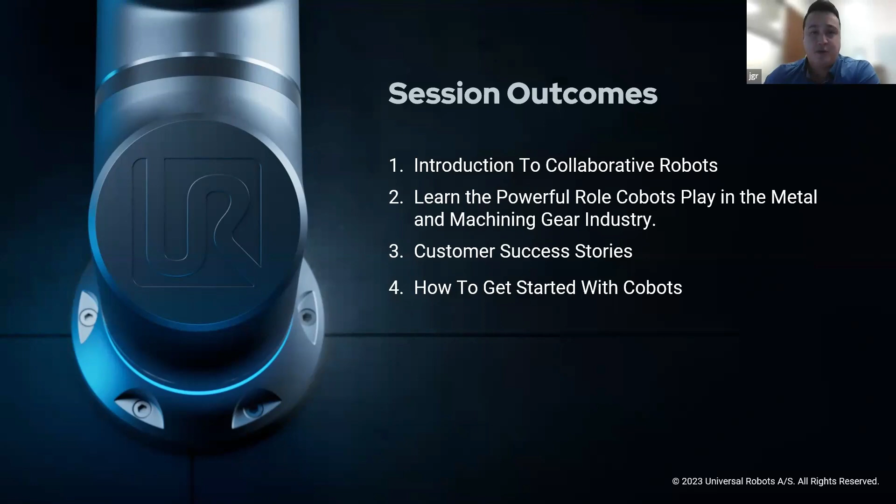And then I'll lead you quickly through how I would get started. If I were to listen to this and have some questions, this is how I would do it, and I'll lead you through some good thought processes on that.

I think it's important to look at our story. When I look at a company, doesn't matter what it is, from a house to your wife and family, you buy products based on sometimes knowing the story, knowing the foundation of that company. You end up having some greater pride for the products you use or utilize in your life. I want to share that with you because it's really important and critical where we came from, and representative of why we're still here today and very successful.

We began with asking a few very important questions. I love what's stated in the middle of your screen: automation for anyone, anywhere. Back in the early 2000s, our company began by asking critical questions, criticizing and scrutinizing what had existed for the last couple of decades in robotic automation.

So they asked, why was automation not built for anyone? Why couldn't it be deployed in more places across the facility? We really did try to create and establish a product that was innovative, revolutionary, that allowed people to say, okay, this is able to be a more utilized tool than I previously thought capable. And I'm talking about robots.

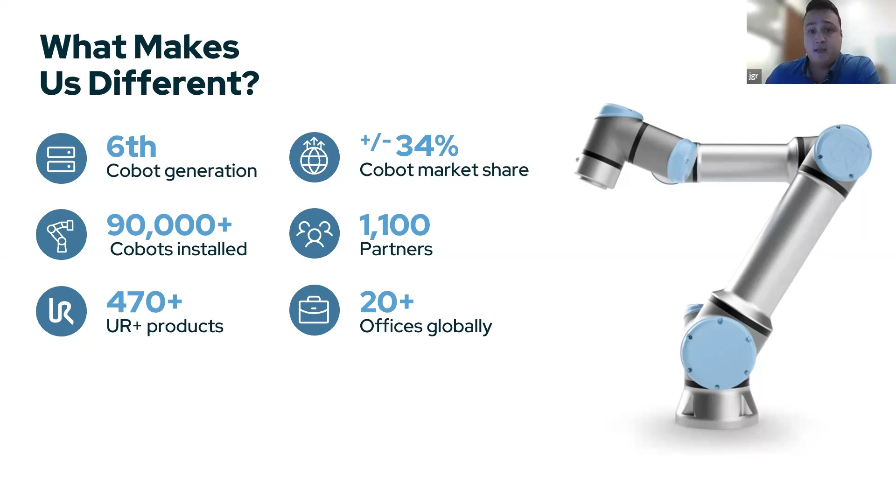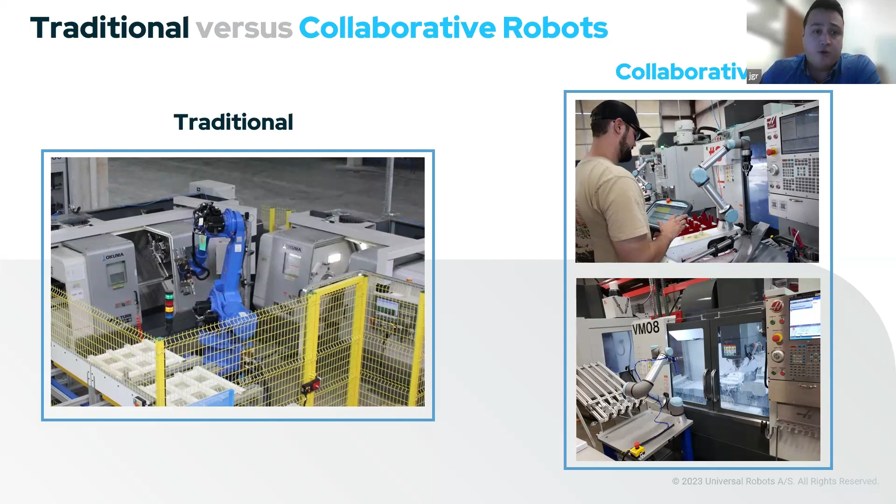On the right-hand side, you can see our product, which is positioned right next to another person. Depending on your environment, this could be critical where you do not have maybe the intrusiveness or the requirement for traditional robots, which is summarized here. And this is generally a general statement, right, or general versus, so bear with us a little bit.

The difficult setup—we're trying to be as fast as possible to set up within your environment, so you're up and running, making parts. And the sooner you're making parts, the sooner you're calculating that return on investment, instead of requiring high programming expertise.

That's something we scrutinized, right? We looked at it really deeply and asked, well, what could we do different? We took a path forward that I'll show you in some videos and demonstrations that allow you to say, okay, yeah, you can touch it, you can teach it by hand.

That's awesome. Instead of a fixed installation that had to be highly dedicated, we looked at a versatile deployment, where a robot—depending on what's going on in your production demands—you may decide to shift, may decide to say what I'm doing right now is not as productive with that product, with that system, that solution, as if I brought it over here and did an inspection.

Maybe your CMMs are backing up. You're like, well, if I could automate that, I could clear up some space, and I'll bring it back into the CNC environment when I'm required to, or when that demand's there. Just sharing that there's a vastness of versatility if things change in your production demands.

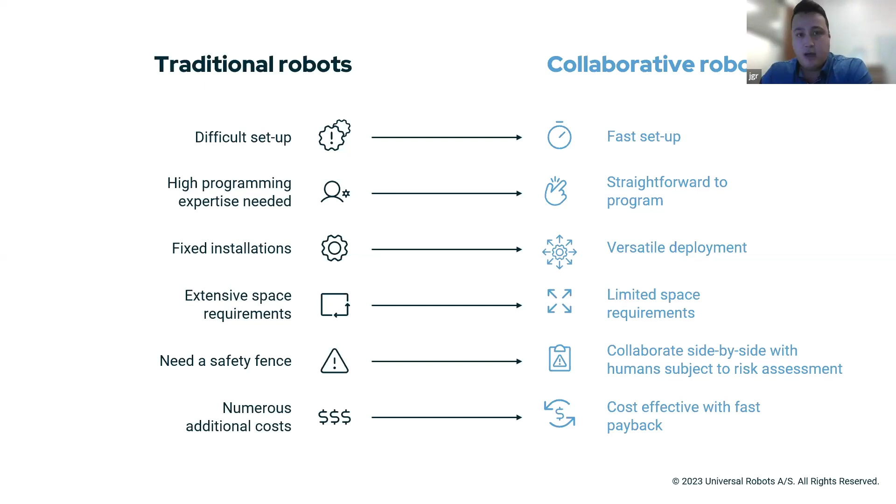Extensive space requirements, need for safety fencing, and those additional costs—those are things we try to work away from as much as possible, right? Limit the space requirements and try to collaborate human to human, or side by side with our robots.

And obviously this is more of a benefit for those that are crowded, those shops that may be multi-generational family buildings. So you are absolutely at the brink of the max of what you can produce in that facility, unless you blow out walls.

So having to reconfigure, move all of your infrastructure for your machine tools—it may not even be feasible, and that may create an issue identifying a place where automation really fits.

So I think it's kind of important to look at this, and again, nice imagery, sort of showcasing that for you guys.

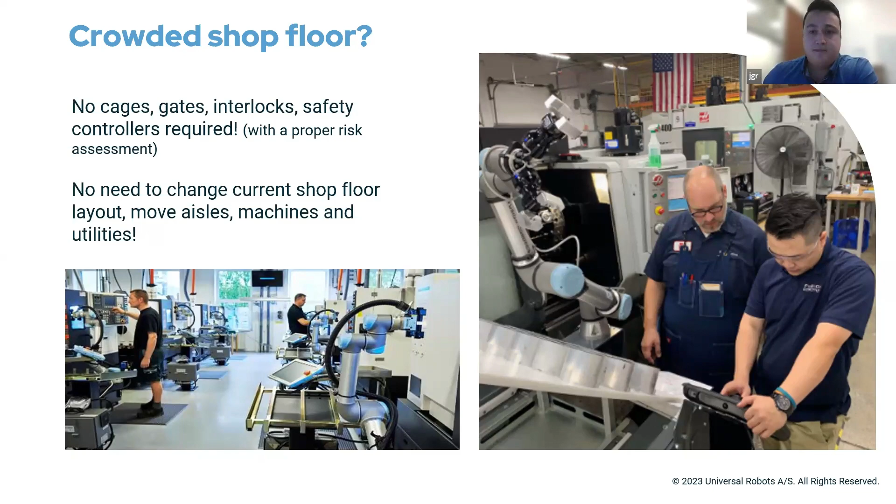User friendly technology—sort of talked about that a little bit, but one thing I can say is that teach pendant there comes with every robot. And one of the things that's different about it too is this free drive functionality. We created a free drive functionality for the purposes of allowing you to really touch and feel your robot, to get intimately involved with training, whether it's moving it through brash or coarse movements.

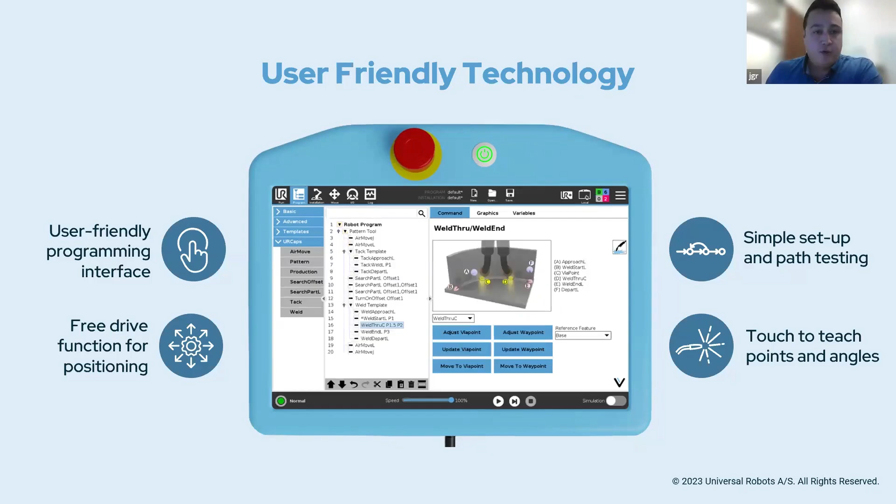And then kind of refining in. We can show you through actually just this screen here that we can position this robot very specifically, whether it's a tool position or a joint position. You could send exact coordinates where you want this robot to be or where you want it to go to. And then, of course, you can control it and jog it just like any other robot.

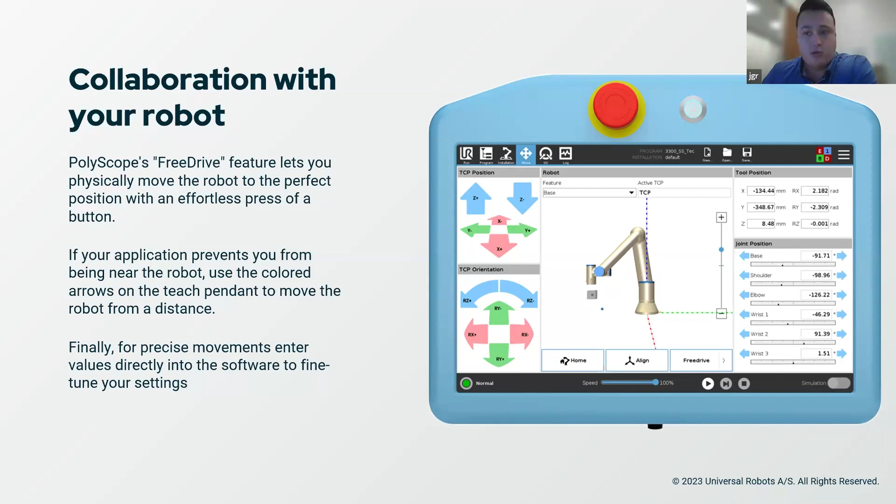But again, being able to touch that robot, be able to make huge coarse or larger coarse moves, really allows you to set up quite quickly. Again, we'll show you that in a little bit.

Looking at the product portfolio, this is the encompassing portfolio right now, but of course, we're always developing and innovating. Some of these are actually even higher payloads now, with 25 kilos, 35 kilos, et cetera. So we're actually even higher up in the range than what we're speccing through this diagram right here. But it's a nice range, I would say.

We're pretty happy with the last couple of robots that have come out, which are the 30 and the 20. Those allowed us to increase our capacity, and in some ways even move into applications we worked well in, but work better in now, having 20 kilos, having a longer reach at 1750 millimeters. There were things like that that just allowed us to succeed.

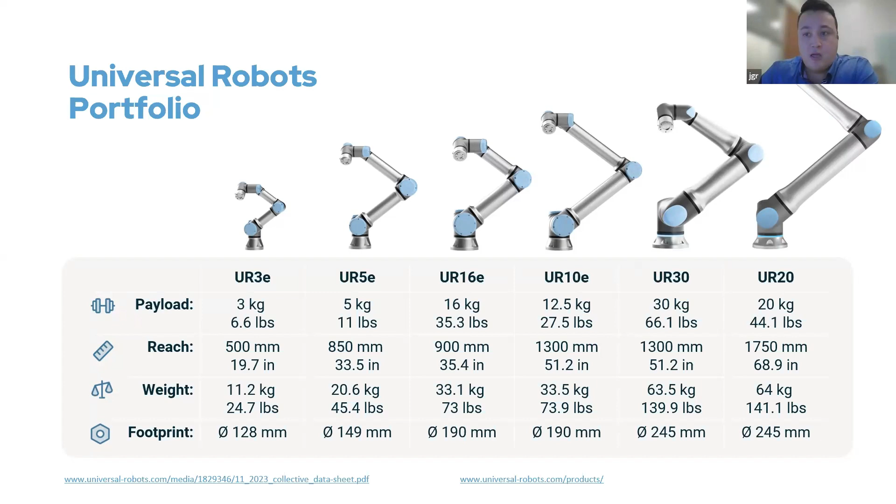And for welding operations, or for picking larger blanks and placing into hobbing machines, sometimes that UR30 is the better fit—that's just the sheer weight or mass of what you're making. So just a quick shout out for that product. It's an amazing product that we're pretty happy with.

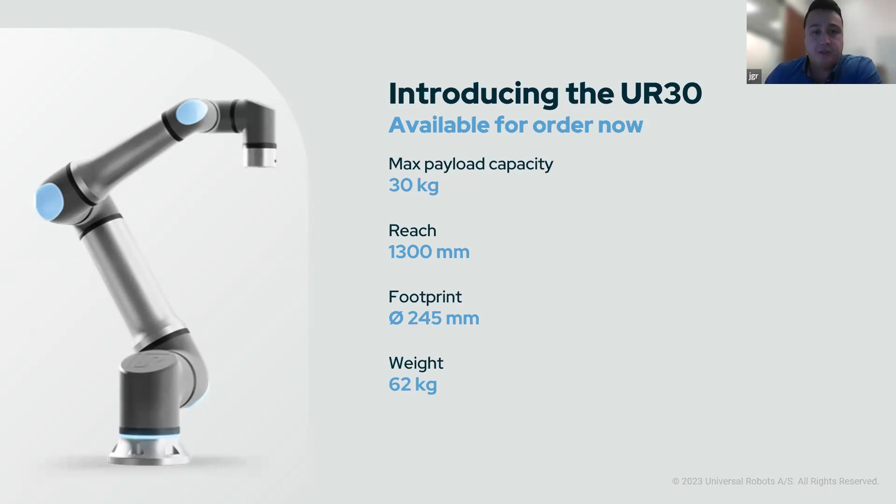And kind of looking a little bit forward, it shows 75. It's at the 90 plus, but this is just sort of a nice little summary of where we're at now.

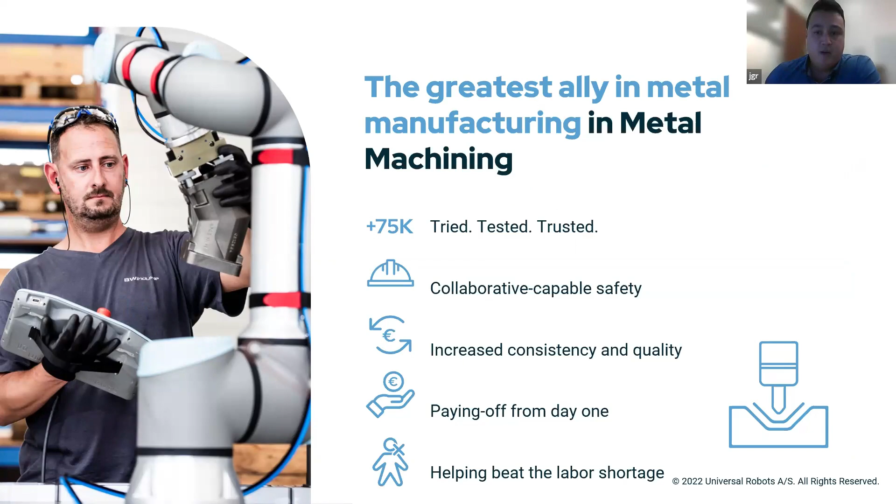I believe the first machines for hobbing were back in the 1830s, mostly for spur gears. I think it wasn't until the late 1890s that we advanced those hobbing machines to also cut helical gears. I'll talk about that a bit more, but the importance is this industry has been around for a very long time, and these machines have advanced even to the point where they're set up for automation. I want to go through that in some detail.

But first it's important to take a step back and make sure we all agree on what we're dealing with. Most of us don't need a deep conversation to agree that it's difficult to find labor, and skilled labor is even harder to find. There's a study I'll show in a bit predicting that by 2030, we'll be in the 2 million range for unfulfilled jobs within manufacturing.

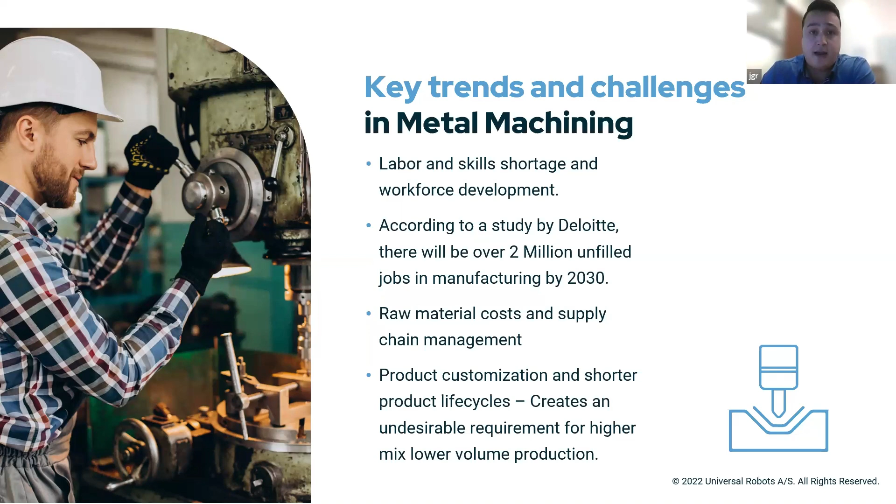We love to talk about creating jobs and available jobs, but that doesn't mean our world actually sees that. We in manufacturing often have a great deal of challenge finding good, consistent labor. Looking at this data from 2022, attracting and retaining a quality workforce was, according to those surveyed, a challenge for over 75% of respondents. By the end of 2022, there were over 2.6 open manufacturing jobs for every unemployed person with manufacturing experience. So there's more available than people joining or participating.

We've seen, even through COVID, I've heard this so many times, that the workforce seemed to exit and never came back. I think they found other work, and we can speculate on that, but it just seemed to have gotten more difficult, and people made decisions to work elsewhere or in a different type of job.

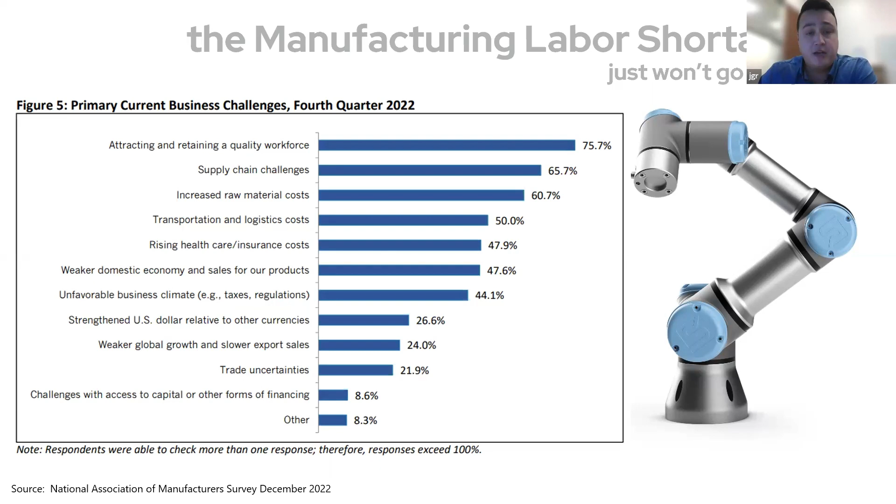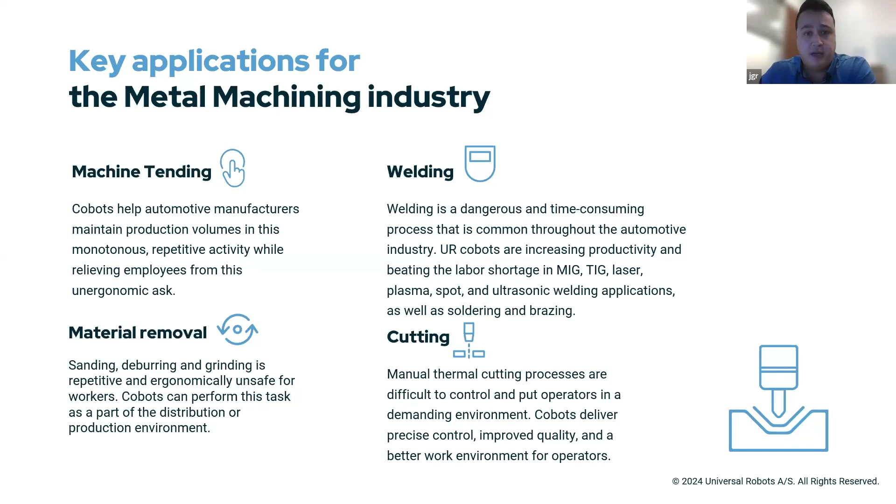These are the four key areas we try to look at in these shops: machine tending, of course—hopefully most of you are here today for that—but we also span into welding capability. Material removal can be really critical too, your deburring, your gears, if you're performing some post-process operation. And cutting—depending on what you're doing, there may be some plasma cutting, just other operations throughout your facility.

So as I said earlier, it's not that we always fit. Depending on work holding, depending on how you actually place that blank in your machine, it may not be automatable, or it just may not be set up for it. But we try to look and start there because the advantages are tremendous.

Increased efficiency, hours of consistent production—knowing that if your takt time is 30 seconds, 2 minutes, or 5 minutes, you're going to be loading that new blank every single time. And not only that, we can post-process and perform inspection, having consistent quality. If a robot places a part correctly, it's going to do it the same way over and over, so we're not chasing these critical issues plaguing your facility.

I've heard it well from a few owners who say that by having consistent production through machine loading and unloading robotically, they find their engineers can step back into the place they do best—working on the business, not in it. They're not chasing around problems, which means they're now focused on product improvements, new product features, or even engineering and designing for the purpose of winning new contracts. It really does free up and allows your business to expand and potentially grow.

And that's just a really great thing, of course, with a payback that we'd love to look at with you guys in your specific applications.

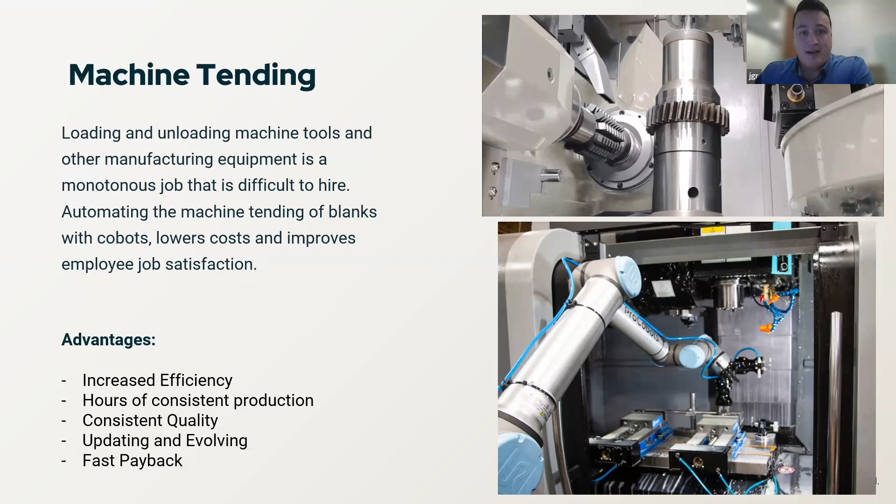And speaking of an application, I want to lead you through a real world scenario. This one has gotten quite a bit of viewership, but I picked the Helios machine for a reason. I think they're set up quite well, but in general what I'm showing here is how you go from picking a machine tool to figuring out how to automate it.

They're typically highly dedicated feeding systems that are bowl fed, which means they're not really flexible. They can be potentially intrusive, and it could take away from being able to utilize that hobbing machine to do a manual operation, because pulling away that mechanized system just may not be possible. It could be mounted to the floor, etc.

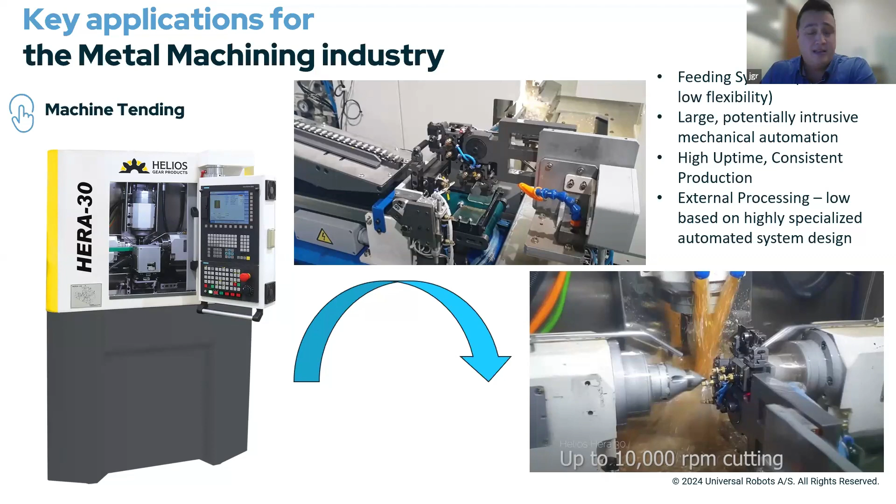So a robot also allows you to do external processing because of articulation. It's not mechanically stuck moving in two or three directions. It can move in many different directions, including to different stations for non-destructive testing, inspection, cleaning, any sort of thing like that. So just wanted to show you that.

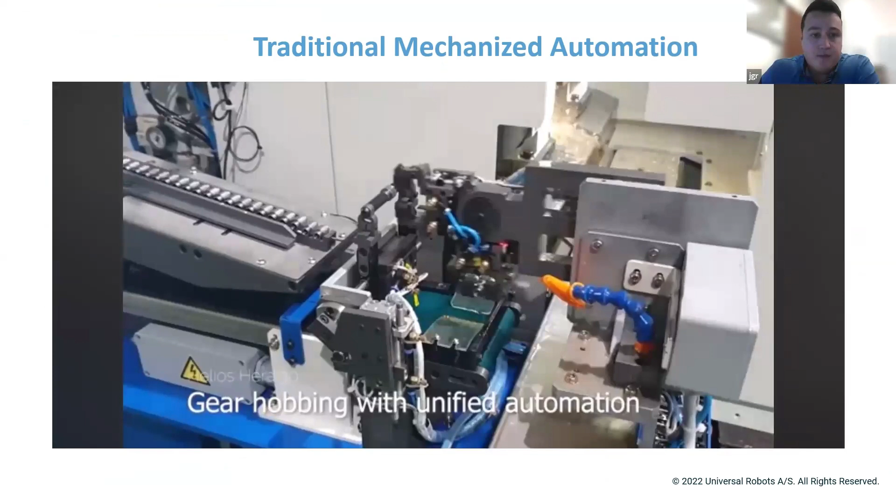And here's just a quick video so you can place it in your mind what it looks like. Again, if you have something highly dedicated, a piece of machinery that's for a specific contract, this could be great.

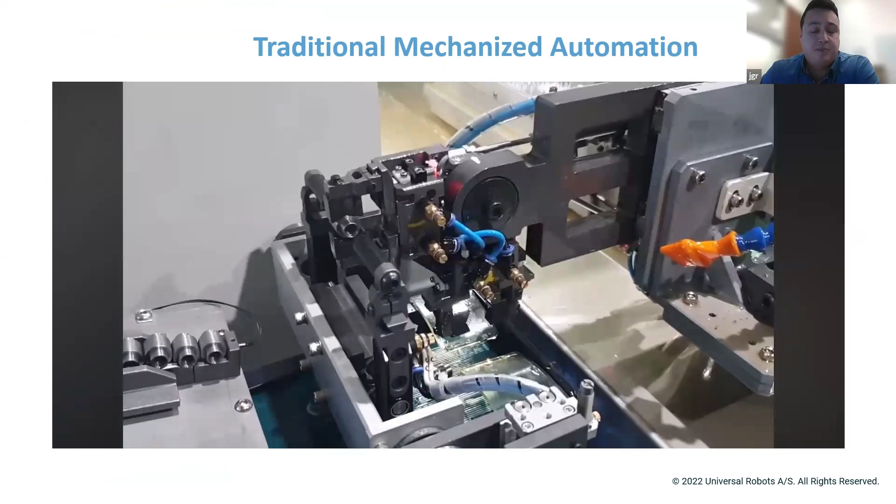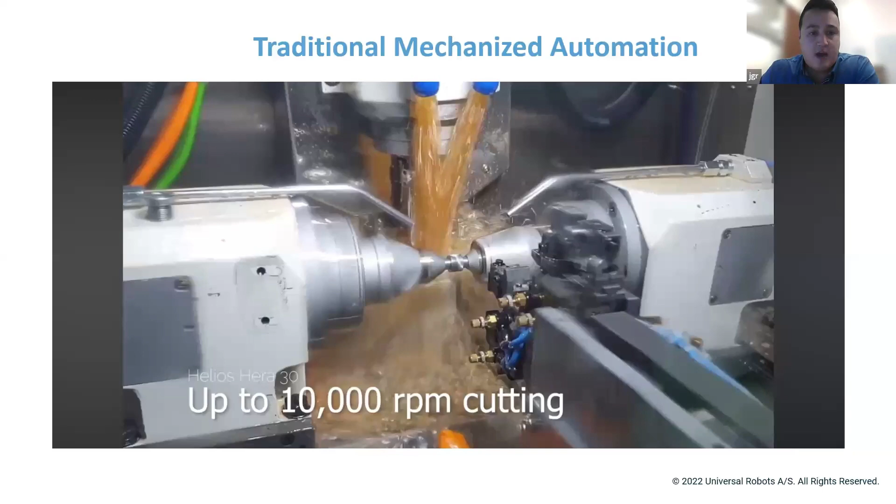But if you do want greater flexibility, which I'll show you in a little bit, we can perform this operation robotically. We may be able to even flexibly feed it the exact same way, but with flex feeders, etc. So getting the glimpse into how it's currently done and the ways we could do it differently, including feeding.

Now, people like bowl feeding because you can load up a whole bunch of parts and just dump and go. There's a good advantage to that. Tray feeding does require the operator to be involved, but it allows for flexibility. So I think there is sort of a trade-off there.

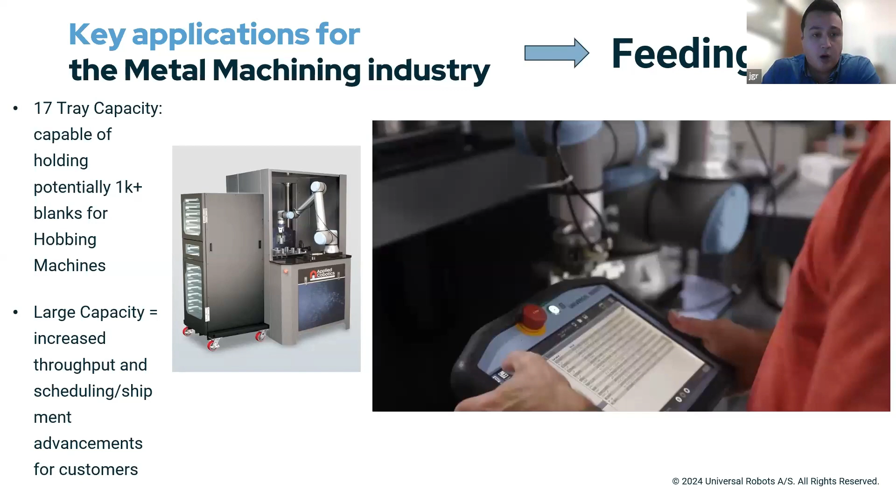But what you can see is a smaller system that, if I just quickly run this video here, can load up to 17 trays. It could be thousands of blanks depending on the size of your components. This allows you to have a large capacity during unmanned hours of the shop, or lights out.

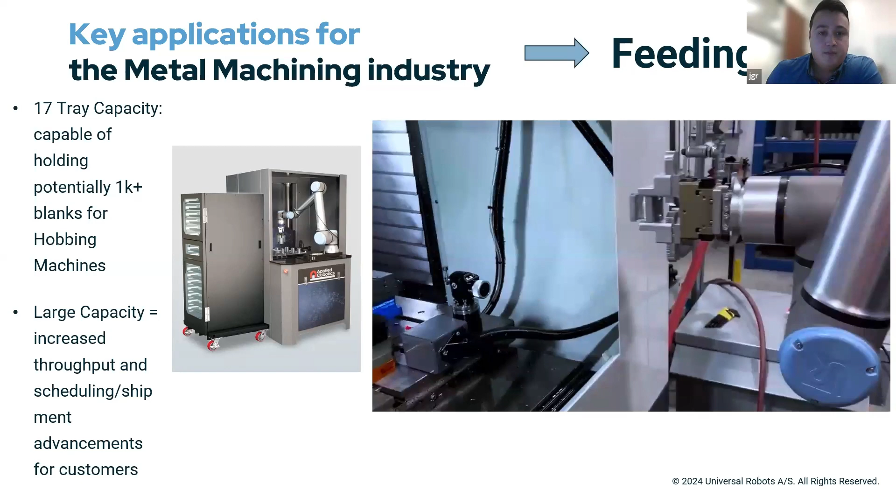So you can see there what happens, it's sort of an elevator. It pulls a tray out. When it's finished, it loads it back in, pushes it back into the elevator, and it lifts up, and again more blanks are shown. The system will pull out a whole other tray of blanks.

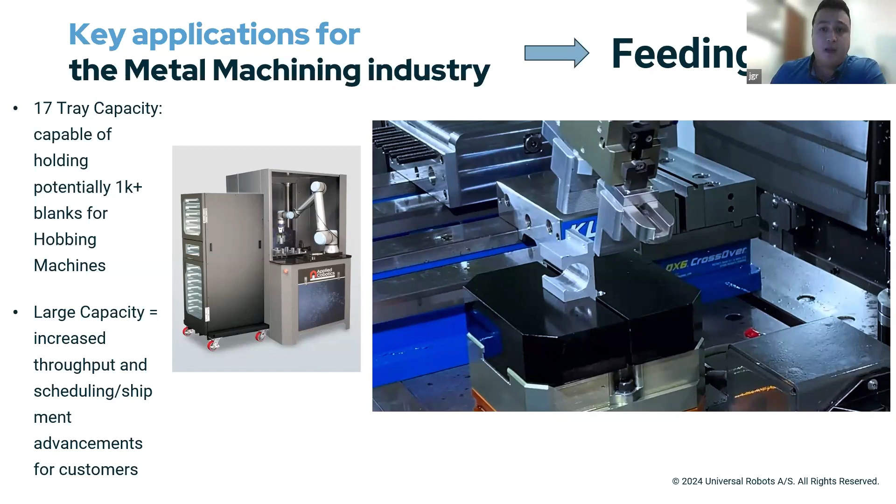The additional process controls I've alluded to: non-destructive testing, resonance testing, PCR, or PCRT, process compensated resonance testing, we'll talk about that in a bit. Inspection, deburring. These are all things that are potentially really critical to you, and it does require an operator.

So if you only automate the machine, the hobbing machine, maybe it still isn't adding the value. So what else is an operator doing? Is it gauging? Is it deburring? Is it doing some sort of testing on the quality of your output, etc.? So just wanted to show you some of the things we can do.

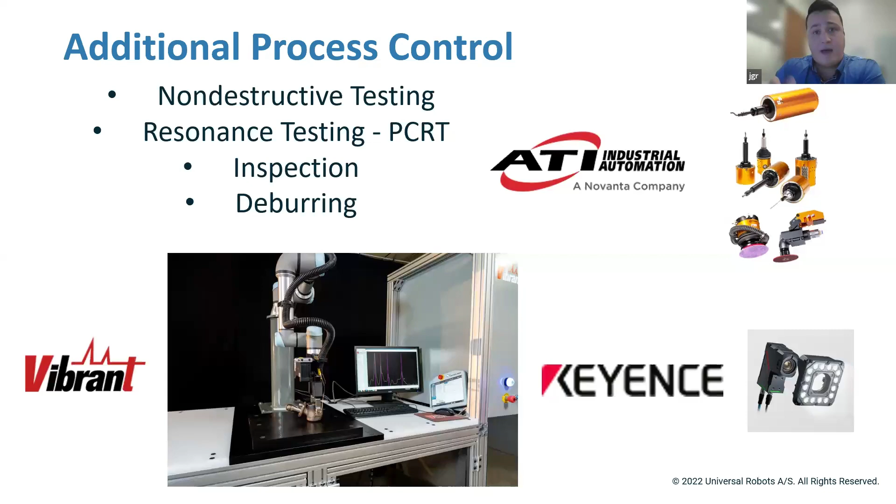Keyence obviously makes some great inspection solutions that our robots can place parts in front of. We can manipulate that gear front side, back side. We can even manipulate it along its axes as well.

From the material removal side, we've got great partners, and these guys are very experienced in material removal. It's nice once you have a gear made. It's not like a roughing operation with grinding, where you're taking a casting, which is variable. This is removing that variability and having something highly specific in geometry to go deburr.

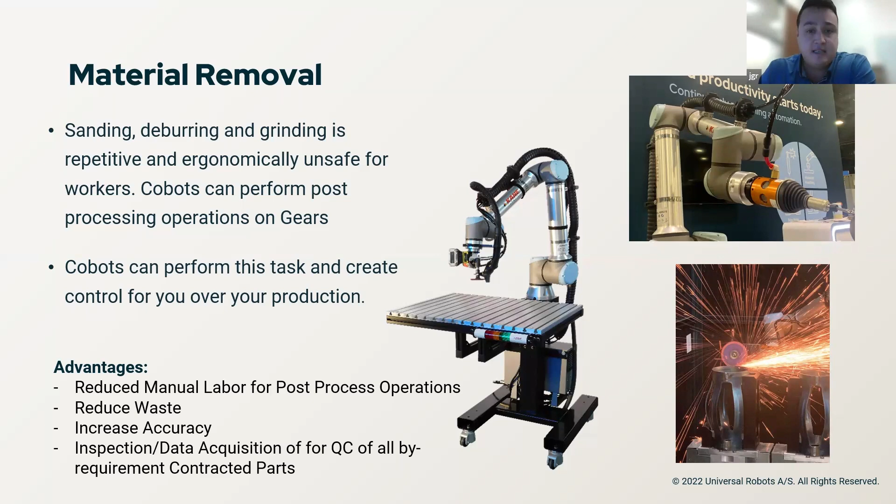And depending on what you're doing, this may even take away machine time or machining time within the machine tool. Maybe we could process that and do that operation outside so we can get on to forming and hobbing that next gear. Ultimately, you reduce manual labor. It can be a manually intensive type of task. So showing you some of that, I think, is important.

On the cutting side, it's just expanding your guys' thoughts out there. We have great partners like Vectis that perform solutions creation for us, and they've created a plasma cutting solution which is pretty awesome. It increases your precision. You can send geometry or CAD to the robot, and as long as it knows its starting point as a reference, it can go cut exactly the geometry that you need into, say, a piece of bar stock.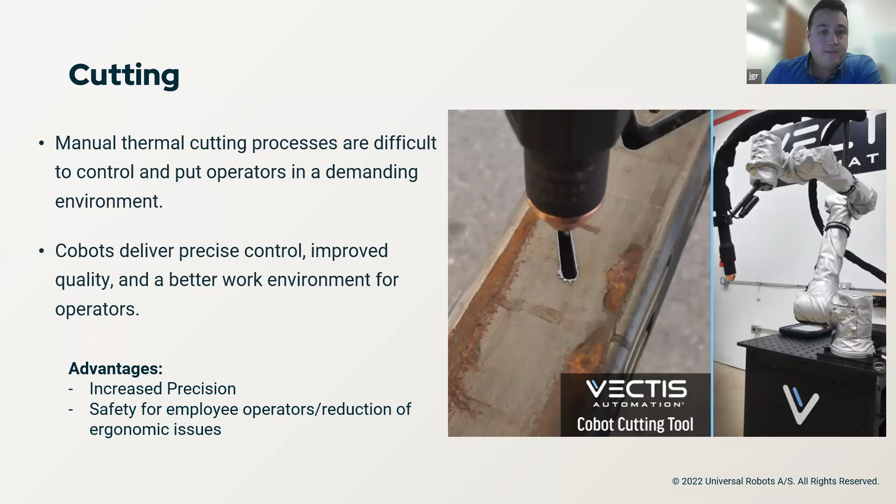Welding, same thing. One of our owners of Hirebotics says it great. He says welders don't know automation, they don't know programming, but they know torch angles and they know weld parameters. So as long as you have a robotic system that allows you to place the robot at a specific torch angle, and for them to utilize a teach pendant and input all these different variables so that they can set up that product or solution system to weld based on the gauge of the material, what we're welding, the materials itself, then we can have an operator actually perform that operation and set up a robot to weld. Most of our robots out there in the field, a lot of them are set up by operators, especially in the welding space.

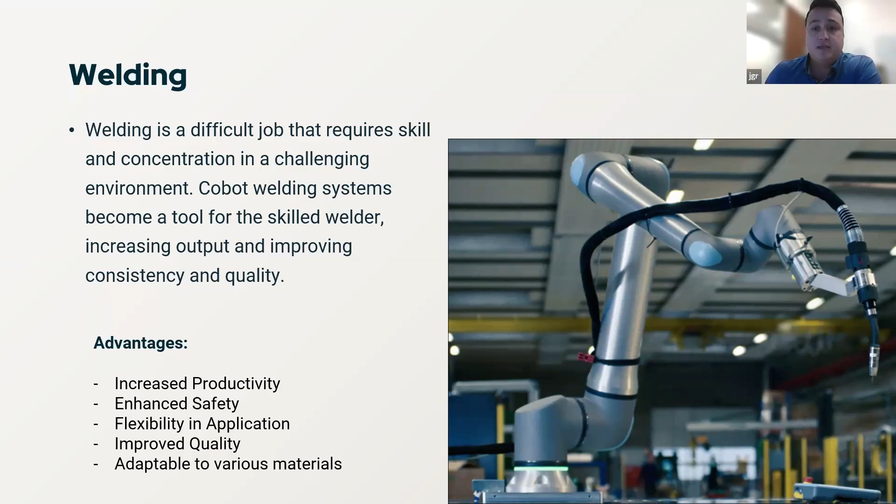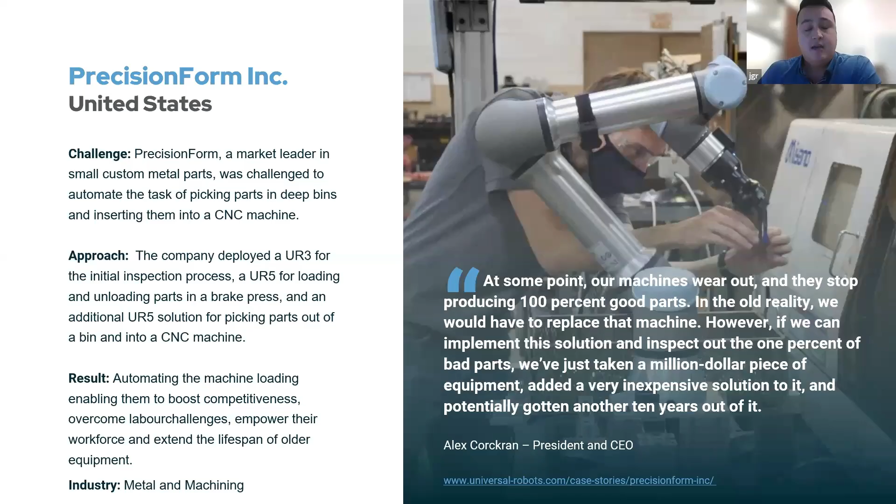On the customer success side, I'll go through a couple of examples. The first one is more of an anecdote I want you guys to see. I think it states it really well. Alex Corckran, I've known him for a really long time, made this quote. He says, at some point, our machines wear out and they stop producing 100% good parts.

In the old reality, we would have to replace that machine. However, if we can implement this solution and inspect out the 1% of bad parts, we've just taken a $1 million piece of equipment, added a very inexpensive solution to it, and potentially got another 10 years out of that machine. That's really a powerful thing too—if you have older aging equipment, you've been hobbing for decades, you may have a piece of equipment that's starting to perform unequally to a new machine. You may have some variation in its performance and quality, but what if we could test out the 1%, like Alex is saying? Could we now have a machine tool that has another 10 years in it? It's just a thought for you guys.

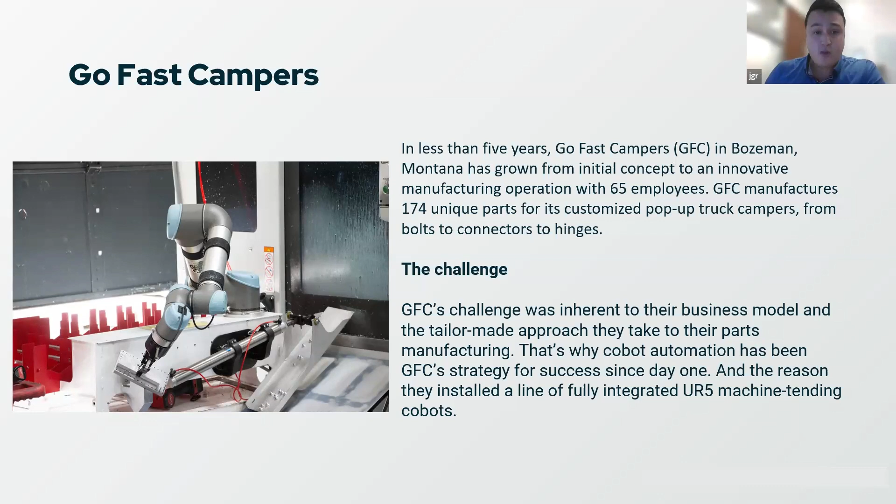This one's a cool one, which is not in gear manufacturing, but it's an interesting case. Their company is called Go Fast Campers. In just 5 years, they grew to 65 employees. But because of their business, they were making a customized camper very specific to a type of truck, a pop-up camper, so they had over 174 unique parts—a really big challenge. What they found was that if they could put a line of 4 UR5 robots, they were getting over 22 hours of productivity, 6 of which were lights out, unmanned, with nobody in the shop. I want you to think about that too—if you're looking at an automated process, you can guarantee its production. You can know that perhaps you could load it up with another 100, 200 parts, and it processes those parts overnight. So now you're getting ahead of your production demand.

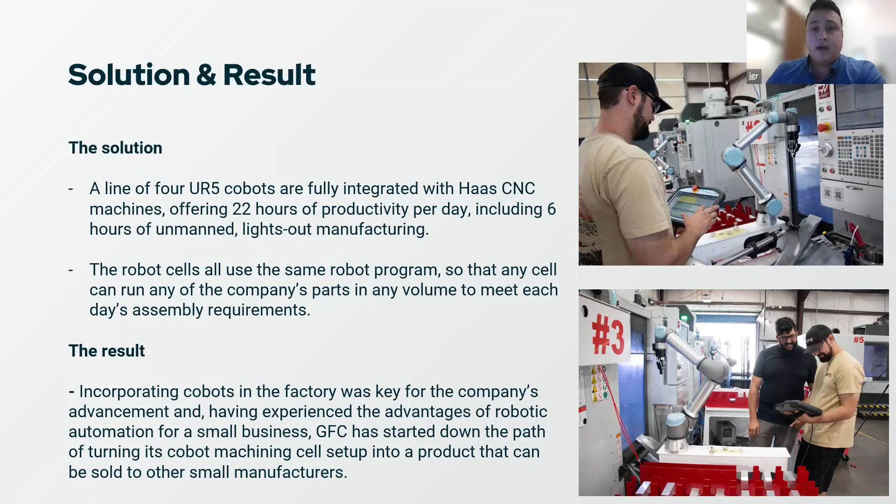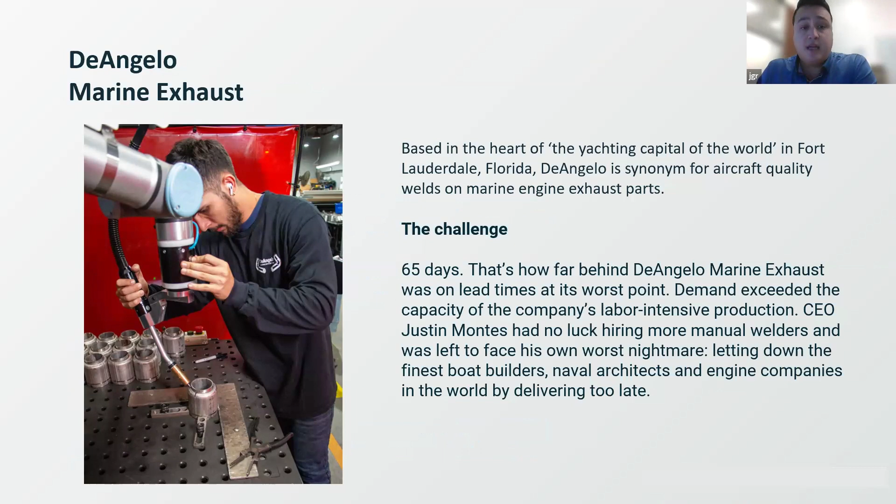That could be good, because for DeAngelo Marine, another example, they were 65 days behind, and they couldn't figure out another way to catch back up. So automating some of their processes, having the current operators who were clearly still dedicated to the company perform the operation of setting up that robot and having it weld, they were able to catch up. I think it was a pretty cool example. They purchased quite a few, and at the end, they also converted through testing from TIG to MIG welding. The result even says right there, they're able to weld 20 inches per minute rather than the 2 to 5 they were welding manually with TIG. Of course, you've got to look at whether that fits if it's highly cosmetic or something very specific with exotic materials that you're doing TIG for, but it's just a great example.

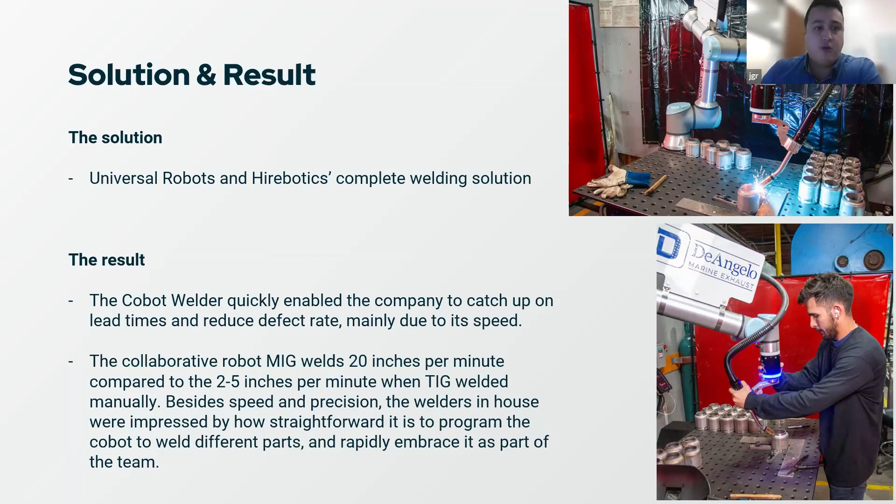So you guys can get an idea, I just want to run this video. It shows Matt Bush here in the video. He's one of the founders of Hirebotics, and he's going to try to set up his system in just 90 seconds.

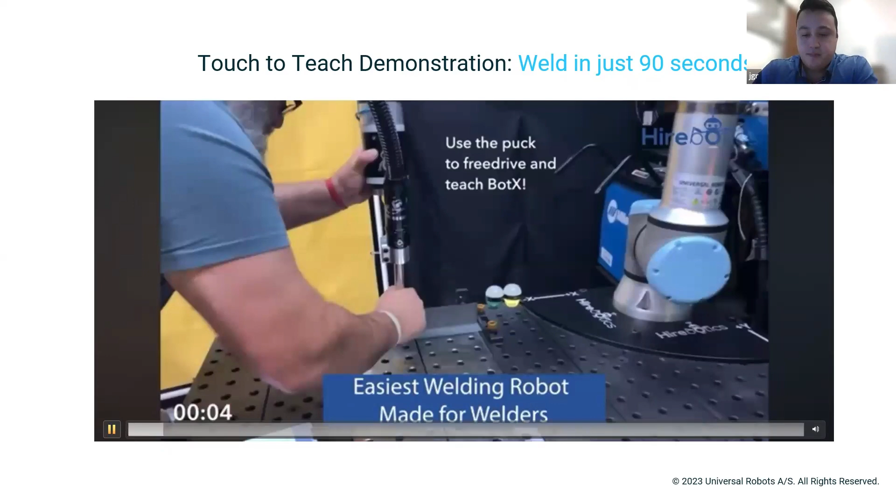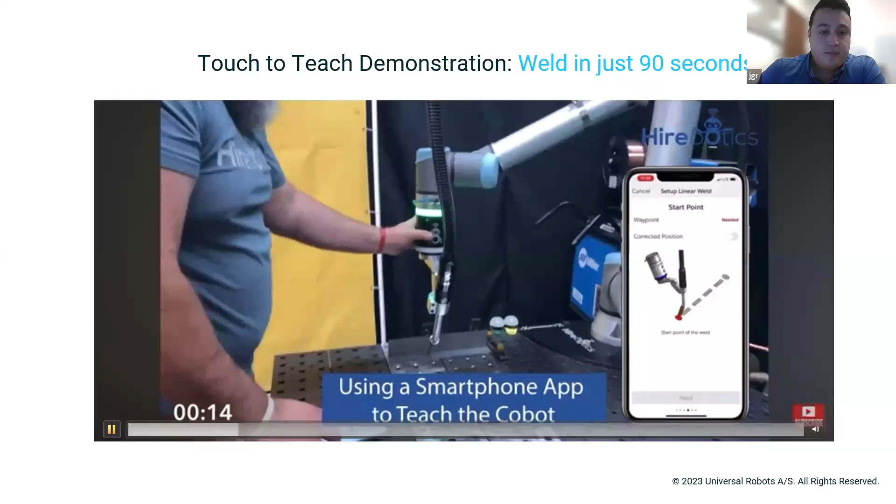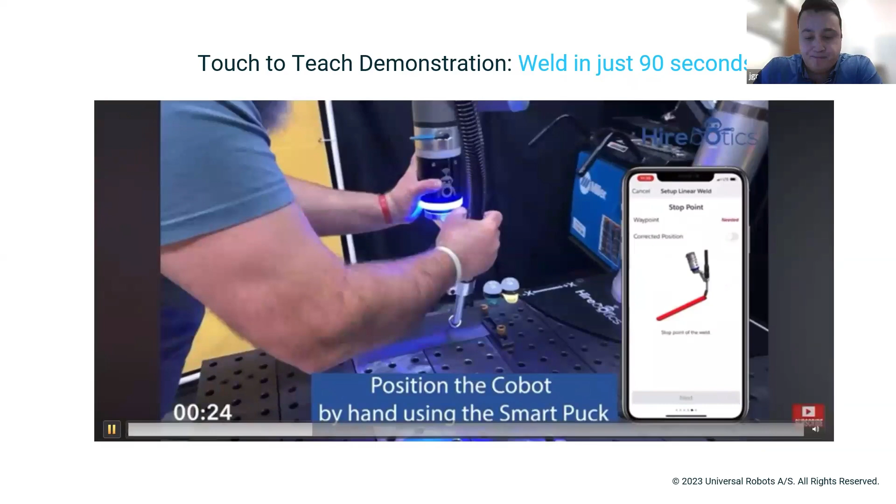So there you can see that they have created a really cool, phone-based app. I was thinking about maybe showing you guys it, because I do have it on my phone, and you can operate it. It's pretty cool.

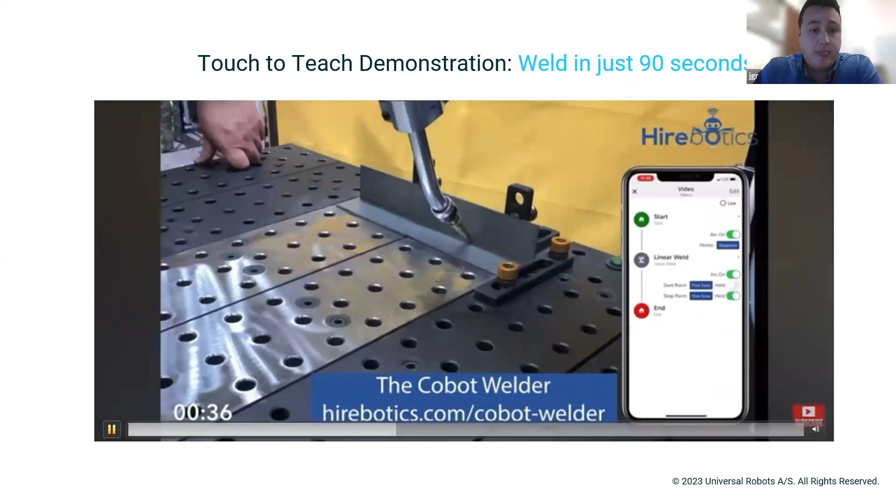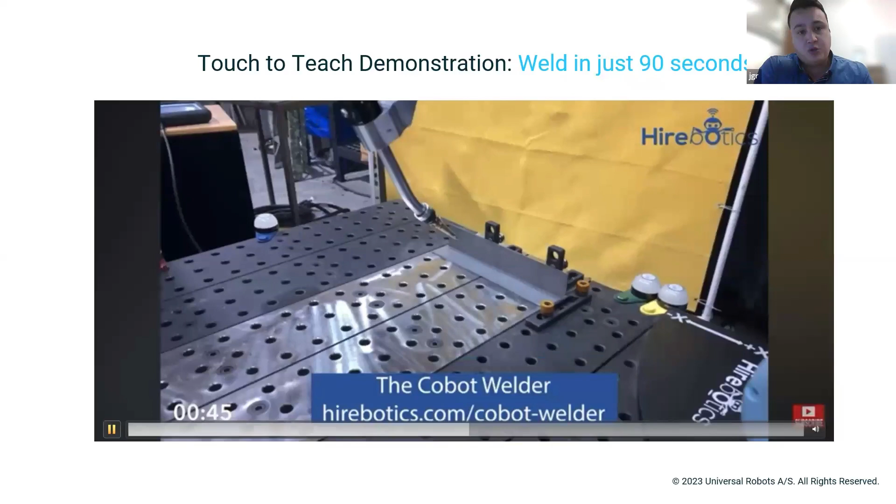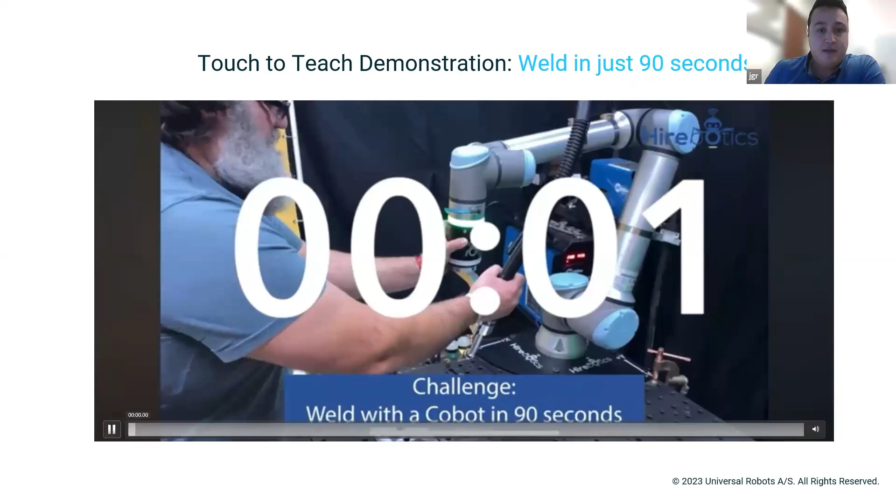I think they try to make it intuitive in terms of the language, the nomenclature. But what he's doing right now is just doing a dry run, right? So there's no torch angles, this may not apply to you guys, but it's showing you the ability to manipulate a robot and set it up quite quickly. And he does get that off the ground in the 90 seconds. Keep things kind of moving here for us.

So we've kind of got to this point where you want to get started, you don't know where to begin. There's a variety of different ways that we can help you guys out, and it really comes down to three main ways.

The CSIs, or certified systems integrators, and solutions partners, they are trying to productize something, which means they've replicated the solution over and over again. They've listened to many customers' needs and demands and requirements, and they've formed and fitted it into a product. So it's very tried, true, and tested. I kind of like that. It's a nice way to start specifically for your team if they don't have experience integrating. So it might be a nice place for those kinds of folks.

But if you do have experience and you've integrated before, maybe a DIY approach is there. We at Universal Robots are always expanding, like we said. We have a great foundation at this point, and we're ever growing in terms of our partnership with direct OEMs. Obviously there's quite a few out there, and it takes time to reach each one of them. We've already mentioned the sponsor today, a lovely partner as well to work with. But yeah, just wanted to share some of that go to market.

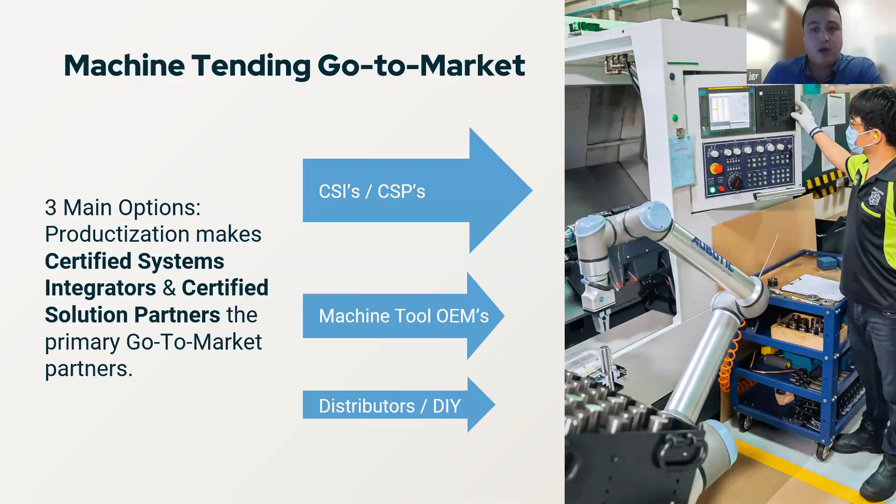And if you do decide to do it yourself, I think it requires technical knowledge. But we do have a huge, astute group of apps engineers and trainers that can help you understand how to work through your application and pick the solutions, the components.

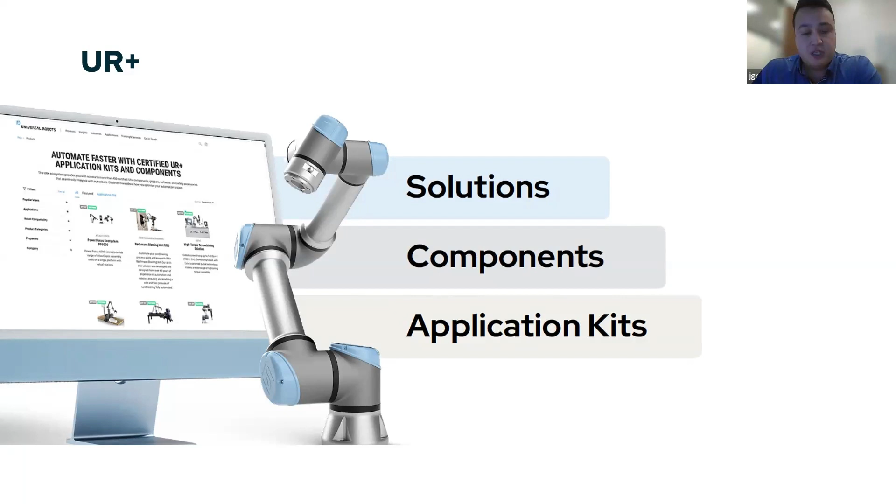So on our UR Plus site, we have a variety of different application kits and solutions that have been tested. And here are some of them, right? From gripping - now again, we're showing Airvise and Rapid Design, they're just a couple partners in the vertical machining world. But outside of that, of course, there's stands from Easy Robotics with drawer systems. I already told you about PBC Linear earlier with their elevator system that can hold up to 12, 13 trays. And ATI has been a big partner for us in the deburr world.

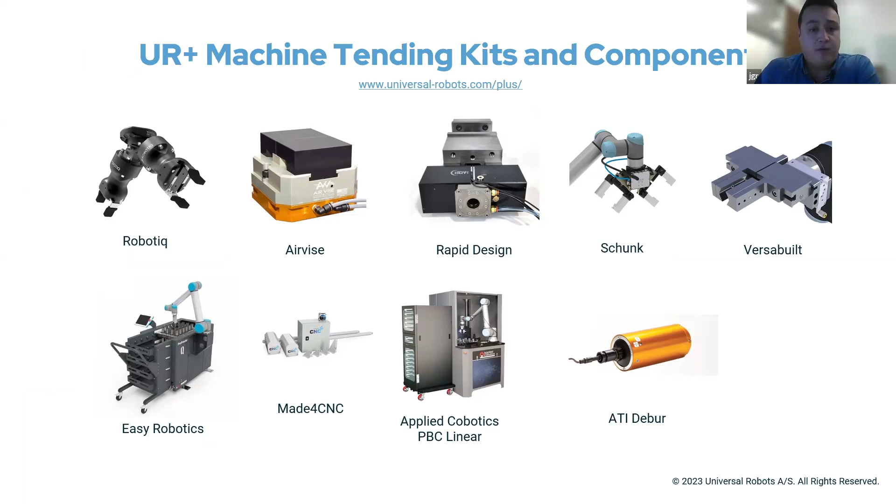If you decide to go the turnkey route, I think the most important thing is the quick deploy, because it's tried and true. So when it hits your shop floor, it's ready to do work, right? It's ready to operate. And so there's kind of a knowable time frame from acquisition to run, and to a point where you envision - so you have a vision, you know what the end looks like.

If you decide to go DIY, sometimes you hit snags along the way because you just didn't know how to do something specifically. It became a little bit more complex, and you might have wished you outsourced some of that work. So depending on that, I would say the turnkey systems that we have from our solutions partners provide a really good value as well, brings down the cost, et cetera.

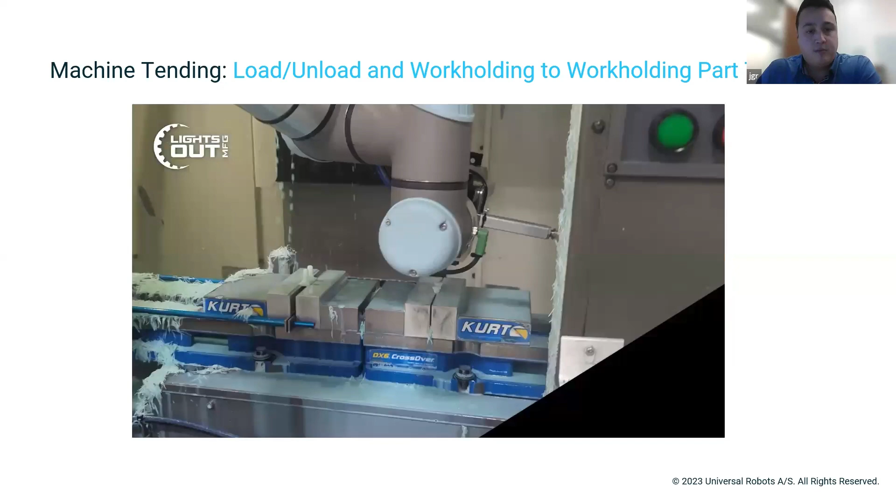Here's a quick video to show you guys the idea of our robots loading and unloading. This is lights out automation—more in vertical and horizontal machining, but in general, it'll show you working within a machine tool.

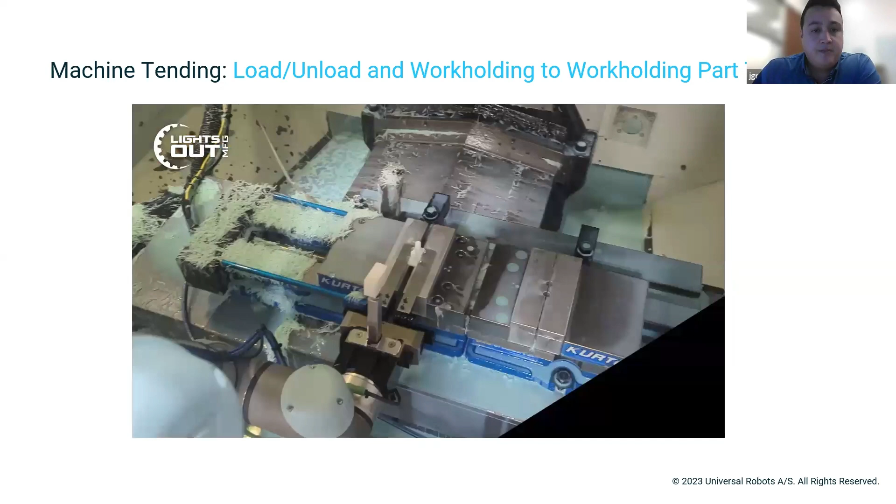So there, we're just pointing out that we have a blow-off nozzle to make sure we clear the work holding. We'll pull those parts out, quick dump, back in, and place the new stock in. For you guys, it would be a blank—obviously not into vices, but...

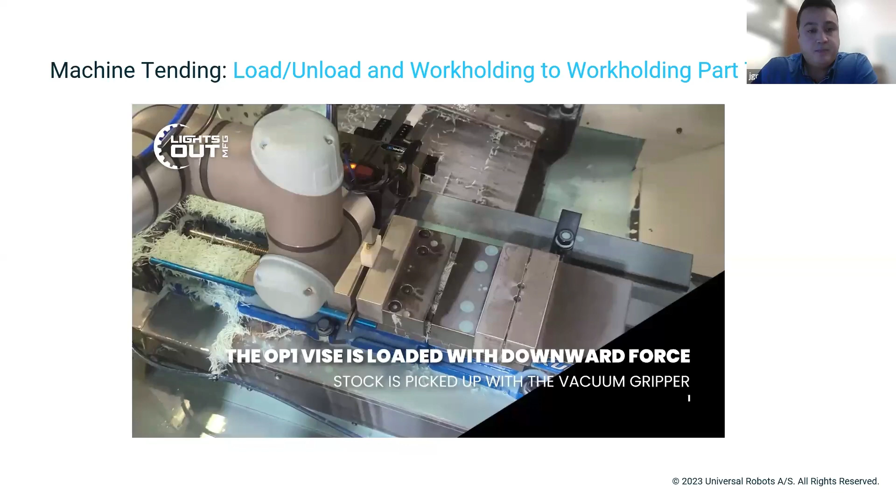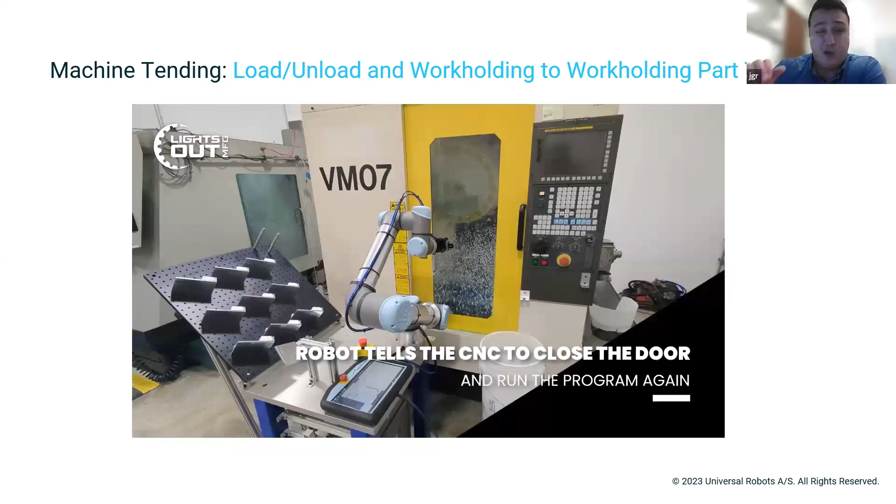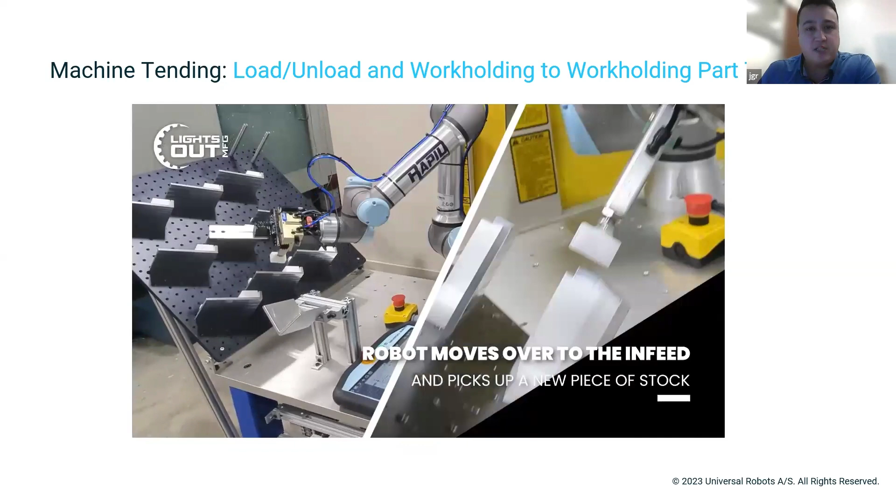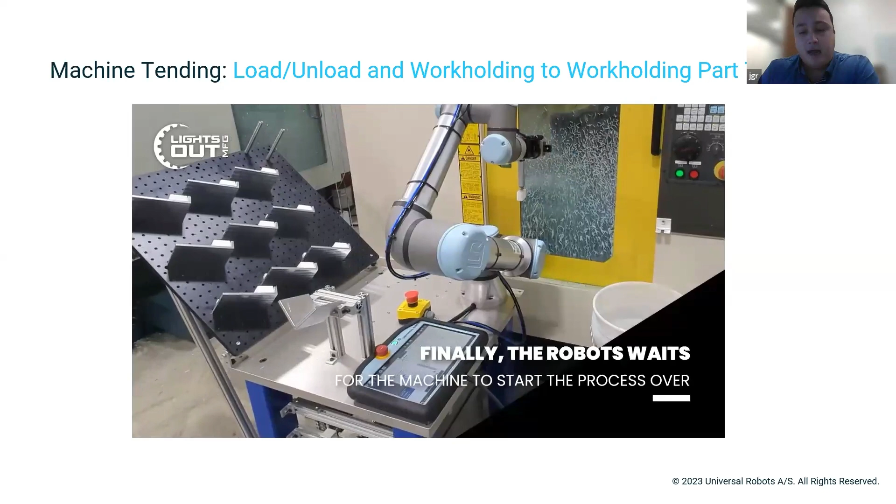And we have a force torque sensor built in, so that's actually using force to push down to a very specific Newton range. So we know if we go to push and say we wanted 10 Newtons of force, but we felt 15 or 20, we know that something was caught up in that work holding. Rather than machining, we'll stop the process, pull out that part. We can have some sort of fail-safe or recovery where it tries to go back in, attempt a second blow off, try to clear, and then place that part back in to see if we can get to that correct Newton range of force.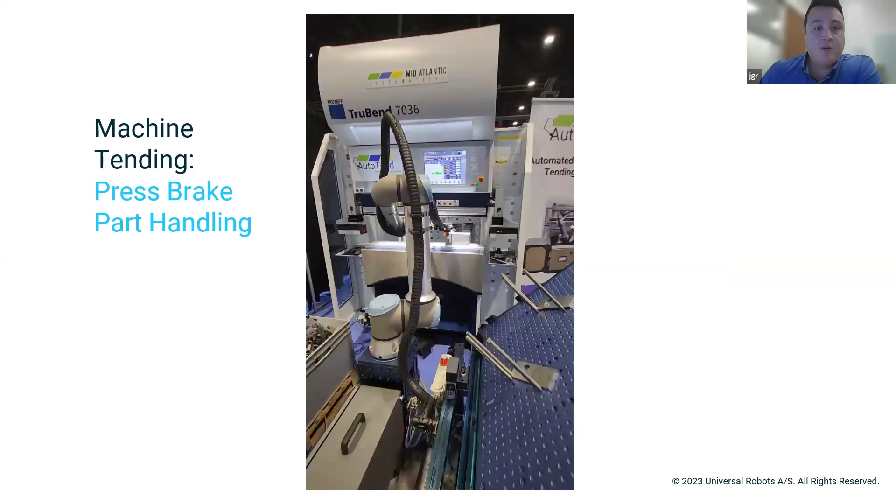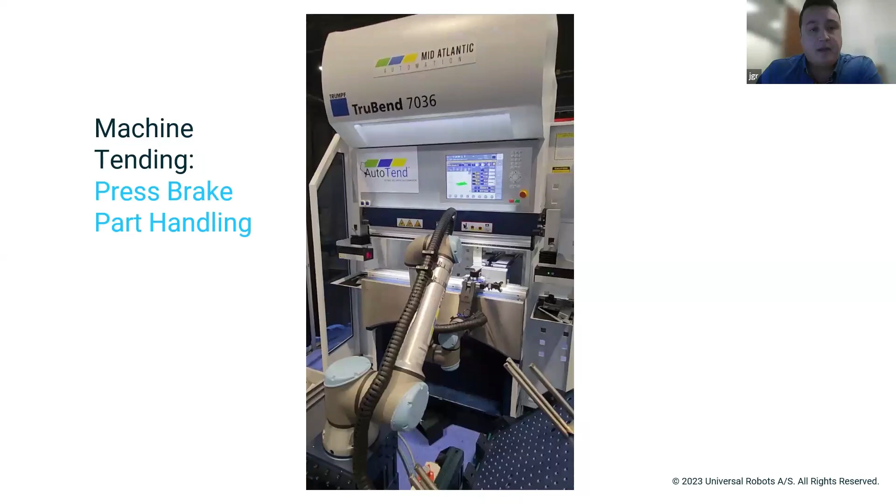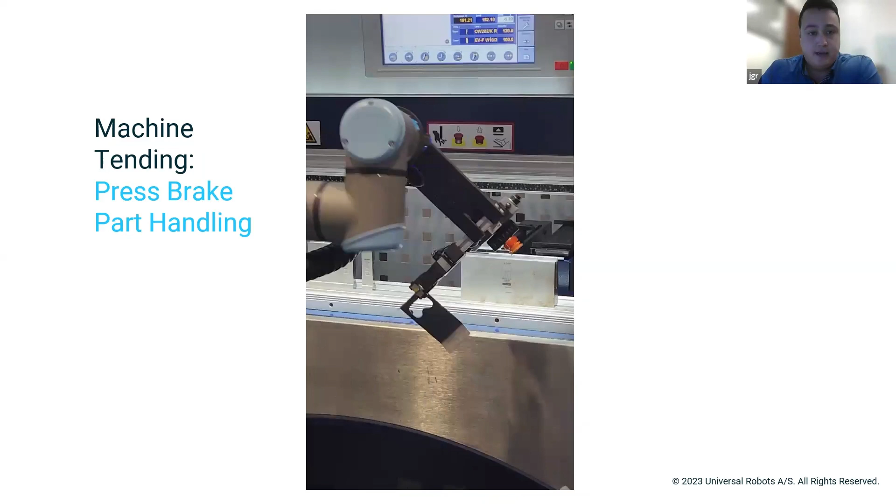On the press brake side, here's one of our partners, Mid-Atlantic Machinery, or Mid-Atlantic Automation, the automation division they've created. Just showing you some different applications. If you're in fabrication, I wanted to share that we have some awesome solutions providers that cover everything from the software to the tooling to the entire system for setting up your parts, in-feed, out-feed. Really, really cool what they've accomplished.

And just an overview of those kinds of companies we work with. Vibrant is a cool one there in the middle—I think what they've accomplished for non-destructive testing could be great for you guys. Just by using resonance, they're able to test a product for variation. So say there are some conditional environmental changes, they can test very quickly for structural defects or issues before it goes out for further machining. I think it's pretty cool what they've accomplished, and they continue to have a focus on the gear manufacturing world.

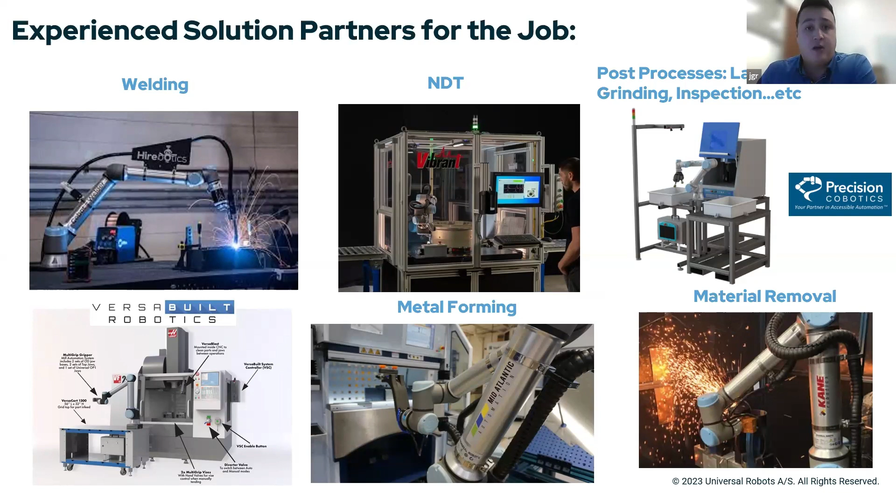And yeah, that's it for me. I didn't want to take too much of your time, but wanted to make sure I got through all that material. If anybody has questions, I'd be happy to take them. If you have something specific, a certain type of machine or application that interests you, feel free to throw that into the chat or the questions, and I'd be happy to talk through it. Really appreciate it, guys.

Well, thank you very much, Justin, for your presentation today. I appreciate that you did some research in understanding more about the gear industry specifically, and a shout out to Helios—saw one of their machines in there and you mentioned them. They're a good member of AGMA.

For those who want to learn more about all the different vendors you've seen—you mentioned there are three different ways people can use your robots. They can buy one and implement it themselves, use a preset partner of yours, or buy a turnkey solution. Is all of that available on your website? If you go DIY, you'll definitely find all of our UR Plus products and all of our solution kits. Some of the turnkey solutions may not be on there, only because the solutions partner themselves has decided they want to control their own messaging to the market. So it can depend.